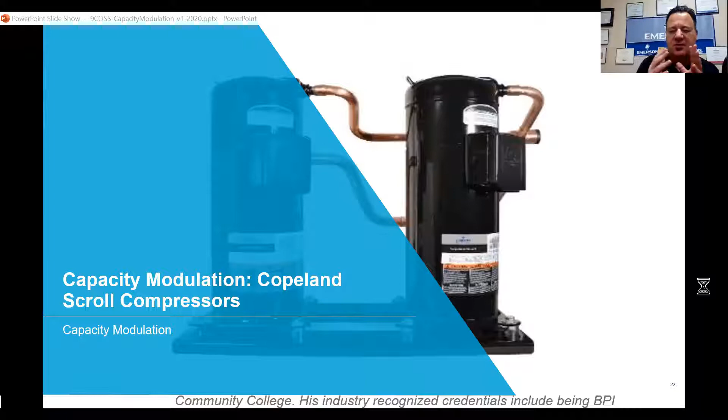Most of you might already know this. The students may not, okay? Some of you instructors, if not all of you, probably already know where I'm headed with this, but I think it's important to point out just a few things about the scroll that I think will make better sense when we get into the modulation part, when I start using some terminology. All right?

So here's our orbiting scroll, and here is our fixed scroll, which is on your right. Okay. All right, so just so you know, I'm not going to go into all the details about the scroll set because this is about modulation, but I do want you to understand some of the moving parts in here. I think it's important for us to have this conversation prior to getting into modulation, okay?

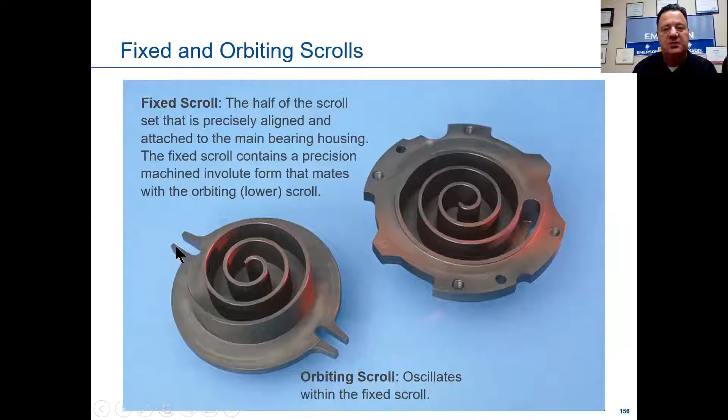The very top of this is your tips, the sides is your flanks. This is the Oldham coupling, and the Oldham coupling, moving back here, is what keeps this aligned, all right? These notches, all right? And let's say this is the orbiting scroll on these two pegs. This is the fixed scroll on these two pegs. And basically, it keeps it from going out of alignment.

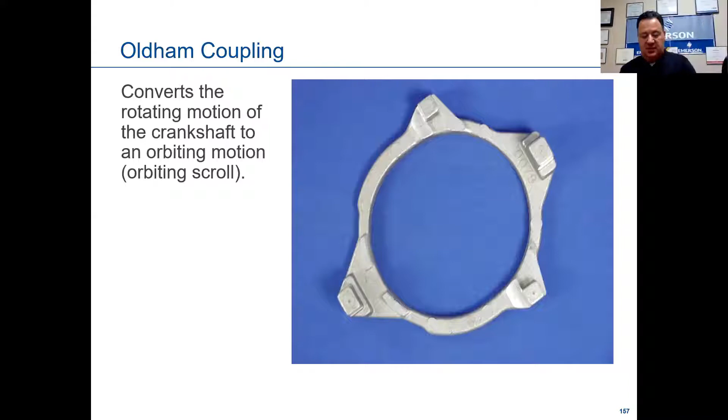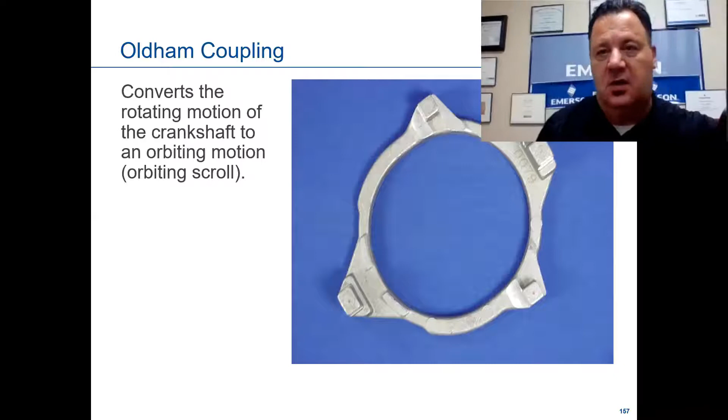I'll show you, put this together here a little bit. Okay, so that's how it looks. I've got the Oldham coupling on these scroll sets, and it's going to go in like this, move around, and compress that gas along those flanks on the side, all right?

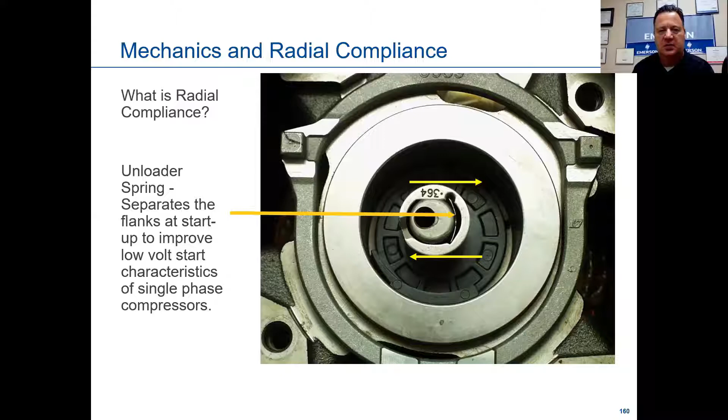So it's much more tolerant than, let's say, a reciprocating compressor is. It doesn't mean it will take liquid refrigerant, by no means, but it does help tolerate it quite a bit if in fact it gets inside there.

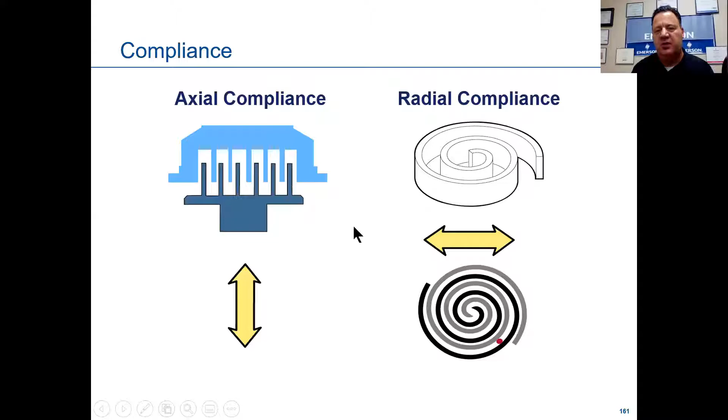So on the left-hand side, we have axial compliance. Now, axial compliance, and I usually ask the class to write this down. This is heavily exaggerated. We're looking more at like 1 millimeter of movement up and down. Axial will be up and down, your vertical movement. This is the radial compliance where I showed you that piece of Swedish steel earlier. This is real important to understand, and this is why I wanted to talk a little bit about the moving parts and just the basic fixed scroll before we get into modulation.

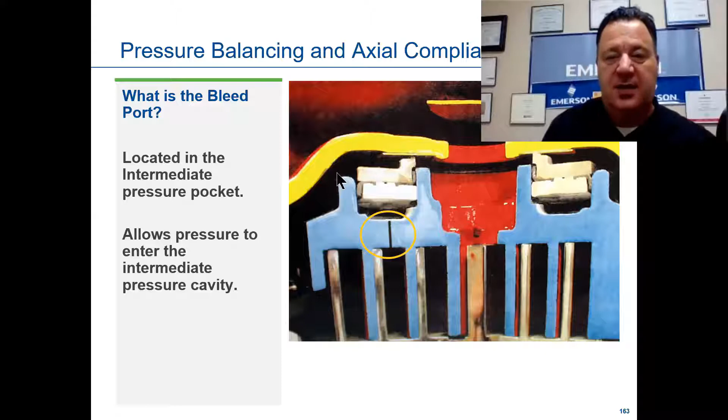The scroll starts out unloaded, okay? It's a 2-pole motor, runs at 3,500 RPMs, roughly nominal, okay? When it starts to load up, as the gas starts to get in, the contactor pulls in, we have a little bleed port here, and as this starts to pressurize on the scroll, the way this floating seal works, this is a large one on the top of it, and it sits right there on top of that fixed scroll I showed you earlier. The bleed port allows gas to get in that cavity. This is normally sitting on that ledge there.

And what happens is 2 things are going on there. It pressurizes that cavity, causing this floating seal to push up on the muffler cap, but it also allows the fixed scroll to go down with the tips of those scrolls touching, okay? That pressurizes that and pushes that 1 millimeter. It's important to know that 1 millimeter because, again, that's going to come into play in our modulation.

This is just a better look at the floating seal. Here on the left-hand side, you're looking at the floating seal sitting down inside that fixed scroll. Right down, looking at the top of it. Here's what that floating seal looks like. This plays an important part because it separates that gas, as we talked about earlier.

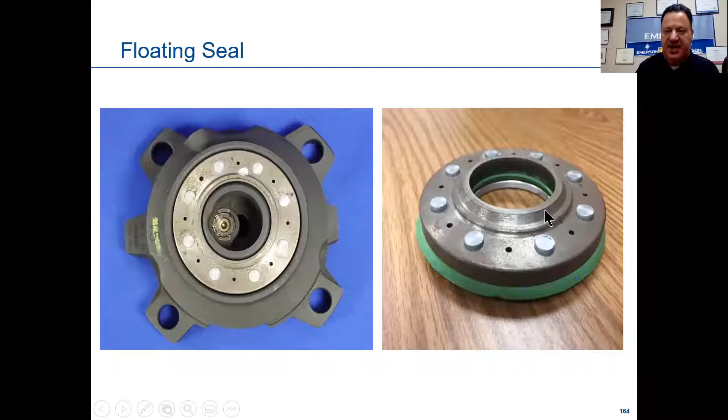When this pushes up to that muffler plate, it doesn't allow that discharge gas to go over the top of it. So it isolates it, forcing it to go out the top above that muffler plate and at the top of the scroll compressor. If this were to fall down, and I'll get into that later on, okay, this gas would then come around and re-enter that suction gas.

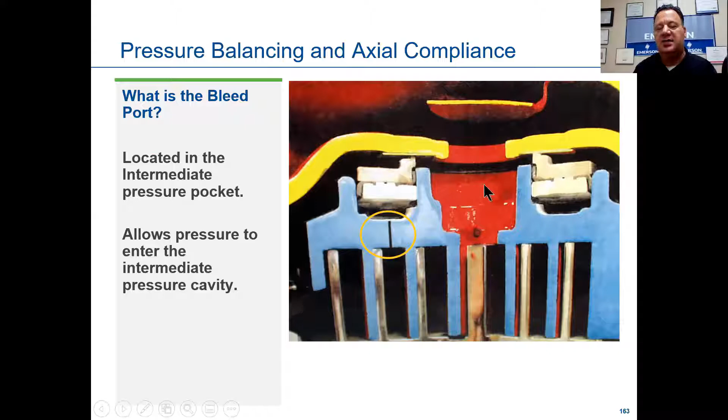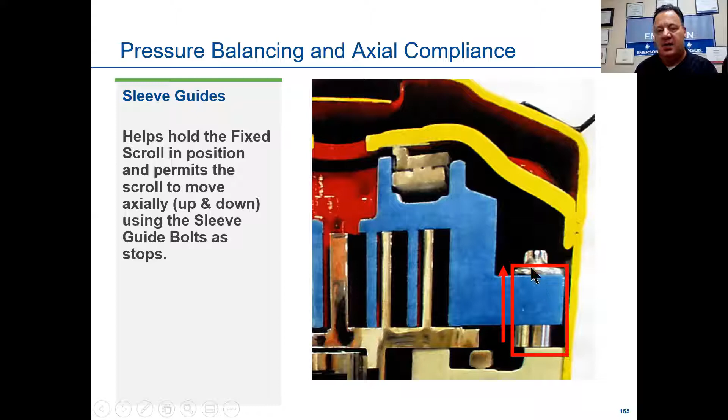Over here is what we call sleeve guides on the right-hand side. That is allowing that 1 millimeter separation when we load and unload, when we get into digital. When I refer to that 1 millimeter on that sleeve guide, this is what I'm talking about, all right? And we'll get more into that as we move along. This is just showing you a check valve.

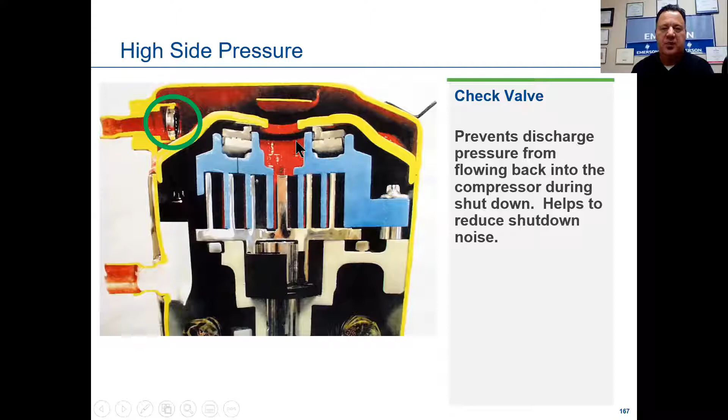Most all compressors or scroll compressors have check valves in them. They range from anything from inside the discharge line as it moves out, leaving the compressor, to dead center, right in the heart of the compressor at the hottest point, in the discharge port. Some may have two.

All right, let's start in with the capacity modulation. We're going to talk about four specific modulations: two-stage, variable, digital, and then multiples, tandems, and trios. All right, so let's walk through these here.

So capacity control modulation methods, we'll walk through each one. Two-stage: a 30,000 foot view here at the beginning is full capacity, obviously 100%, like a fixed scroll if you will. That will be your second stage at 100%, obviously. 67% or 65%, two-thirds of the capacity will be your first stage. And I'll show you how that works also.

And then staying at the top to the right of that, we have variable speed, customized scroll with variable speed frequency drives. We'll talk about the drives and how that works, because that's the one that's really catching on a lot in the industry right now. I foresee that being a big major player, as it did with mini splits years ago.

And then we have at the bottom left, digital, mostly seen in refrigeration, can be used in air conditioning too. I don't want to sell it short, but we'll talk about where that best fits at. It starts at 10% to 100%. In other words, until it gets a call for 10% of the capacity, it does not turn on.

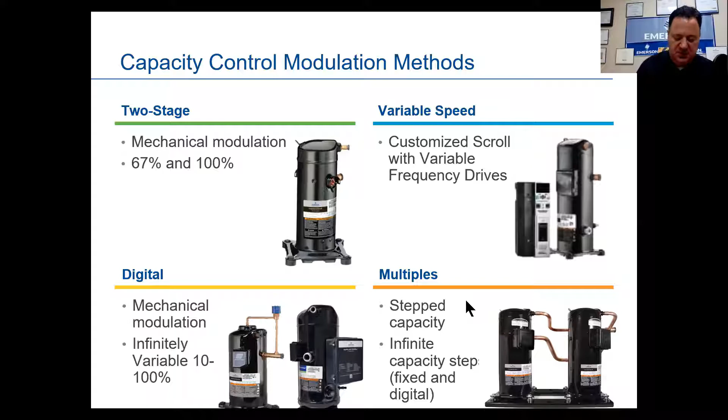All right, and then we have multiple, tandems, or trios. It's a step capacity, infinite capacity steps, fixed and digital. So you can have two compressors, they don't have to be the same size, they don't even have to be the same model of the compressors. They can be different BTUs and different tonnage. So we'll walk through those.

Now this is just a snapshot of the compressor modulation technology comparisons. I'm not going to spend a lot of time on this because this is more salesy marketing. I do show this in class, but it's just really to give technicians an idea, if they're quoting equipment, what that might look like to them.

All right, so we have our fixed scroll. We talked about that a little while ago, just basically the anatomy pieces of it. We have the modulation technology on the top left, and then we have our products, the range, what horsepower they come to, the part load efficiency, full load efficiency, and then what does that look like with comfort. And then we have our applied cost. So again, we start out with fixed, we then have two-stage, we have digital from 10 to 100%, variable speed, and multiples.

Now, none of these compressors, with the exception of variable, have a pump for lubrication inside them, all right? So that's unique to that. If you're teaching scrolls, at least the Emerson scrolls, we do our lubrication basically by physics. We manipulate the shaft and different things in there, and apply that lubrication up through that shaft by simply ramping up that 3,500 RPMs that a fixed scroll has.

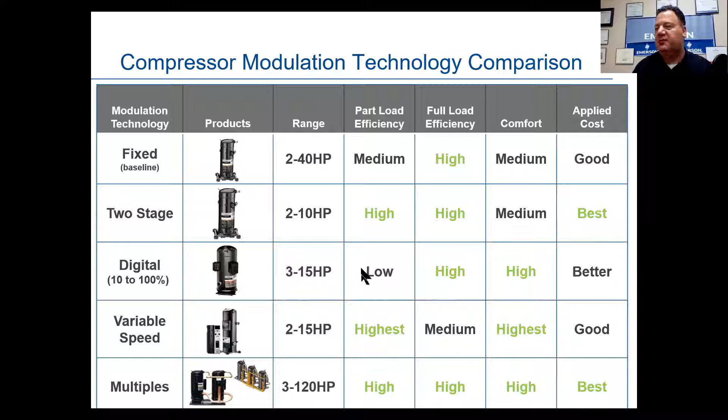The next one that I really think is a great technology, especially in refrigeration and air conditioning, that's catching on quite quickly is the digital. We unload and load that compressor, we don't shut it off necessarily. I'll talk a little bit more about that here in a little bit.

All right, the first thing we're going to talk about is our two-stage. And again, we're talking about 67, 65%. The reason I say 67, 65, on some videos that Emerson's made it will say 67%, some presentations I've seen will say 65%. Neither one of them's wrong. Just remember this: first stage on a two-stage compressor, at least when we talk about it, is going to be about two-thirds capacity. So the 100% is like a fixed capacity, partial capacity or first stage is going to be about two-thirds of 100%.

In fact, I'm going to show you, this is part of that ring I was talking about at the very top. I don't know if you can see this or not. I'll do this again, I attempted this earlier and it seemed to be okay. You can't really tell, but there's three little holes in the top of the fixed scroll.

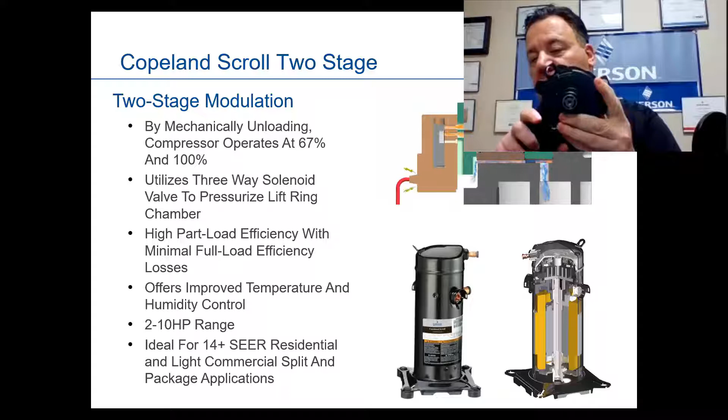There you go, you can see my light coming through there. There's three little bleeder holes on both sides, and they're in the medium area of that fixed scroll. See my flashlight shining through there? Two little bleeder holes at the very top, you can see it.

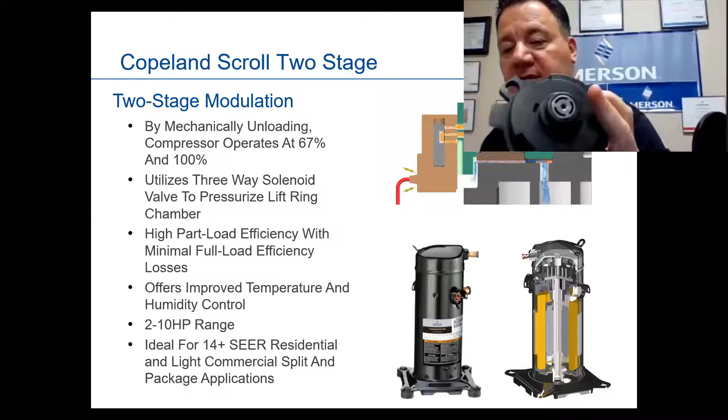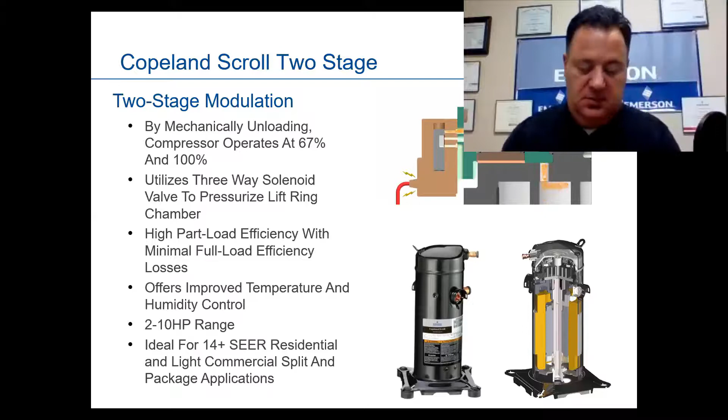When those get blocked off, it doesn't allow that refrigerant to come out. When it slips out, that module — it's AC to DC, and it causes it to turn and bleeds off. Now in this animation, you can see, now we're powered, we're shutting it off, we're running 100% capacity, unloaded, shutting off.

Now, high part load efficiency with minimal full load efficiency losses offers improved temperature and humidity control, in the 2 to 10 horsepower range. Ideal for 14 and above SEER, residential, and light commercial split and package systems.

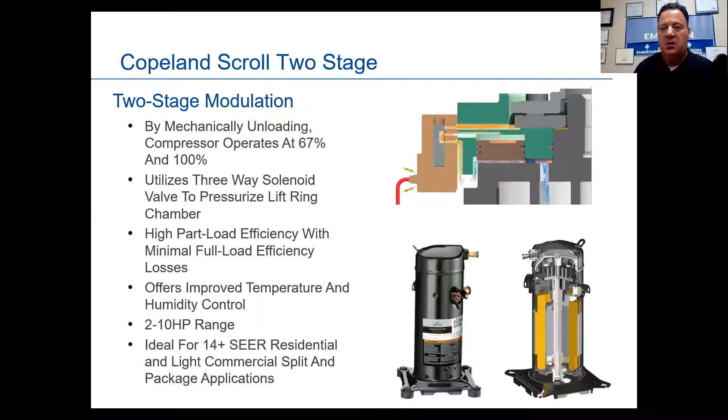See a lot of two-stage out there in residential and light commercial. For the most part — and I haven't been gone all that long in the field — two-stage is, I mean, most of the technicians are fairly familiar with it. Do they know how to troubleshoot it? That might be a different story. I don't know, but they understand the concept of it.

Now, the Copeland scroll two-stage modulation operation, at the very top, I'll start up here. Again, you're powered up, all right? Now we're blocked off, we're at 100%, or here we're at partial. We energized, blocking it off. Now we're at full capacity. Here we're at 67%, you can see it's bleeding off.

Over here on the right, partial load operation: intermediate cavity pressure is communicated to a lift chamber via a three-way valve. The valve is de-energized when we go into that first stage, as we talked about earlier. You can see that lifting up, that lift ring, that three-way valve lifts it up, and those bleed ports that I showed you earlier in that medium cavity — here's the low, medium, and high pressure cavities — will bleed out from both sides.

All right, modulation ring moves up, opening the bypass. At the bottom, you'll see it's a full load operation. Suction pressure is communicated to the lift chamber. The valve is energized now at full capacity, at 100% or a fixed capacity. You can see the bleed ports down here at the bottom on the left. Partial load, when it shifts, those open up. You can see at full load, those ports, if you will, are blocked off.

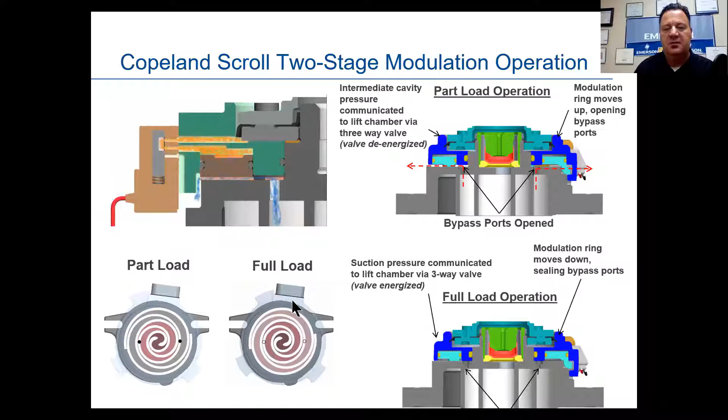Here's our module. Okay, now we're going to talk about multiples — that's going to be tandems and trios. All we're doing is taking multiple compressors and mix and matching them. They could be uneven or even — in other words, they could be the same capacity on both compressors, or for the trios, they could be the same capacity, same BTUs, horsepowers, or they could be mix and match. They could have a digital on them. So there's all different opportunities here to best fit that application.

So let's take a look at this. This one is the easiest one to comprehend, because all you're really doing is matching up the load with multiple compressors.

What is a multiple? It's a pairing of two tandems or three trios, fixed speed and/or mechanically modulated scroll compressors, variable speed, digital two-stage compressors, to achieve a capacity modulation. Multiples allow modulation of compression capacity while maintaining efficiency and potential reduction in cost. You see a lot of this in commercial applications, some refrigeration applications.

Very good stuff. You won't see things like this in residential, obviously, but there is a place for it, and we sell a lot of these. The only thing I want to point out to you, if you're an instructor and you're planning on teaching this, or at least touching on it, the thing I like to drive home when I'm delivering this out on the road is be aware that there's going to be multiple model numbers.

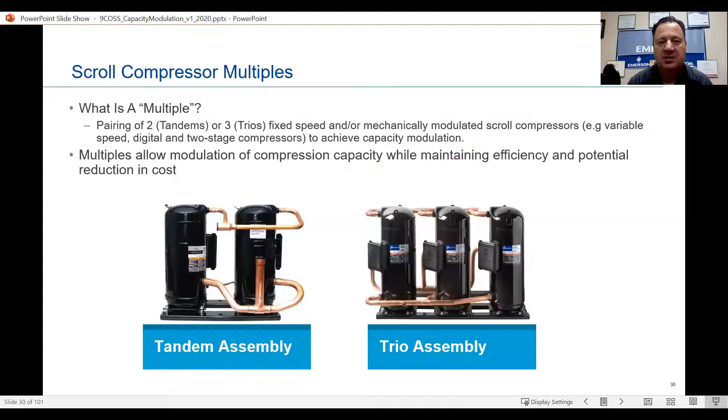Okay, advantages of compressor multiples: efficiency and economical — high system efficiency at both full load and partial load, possible reduction of applied cost through reduction in the number of circuits in the HVAC-R system. Flexibility — versatile compressor combinations to meet targeted part load efficiency points. Oil management — no auxiliary oil management hardware needed. And load matching, as they all are in modulation. That's basically the whole concept of matching the load. Stepped capacity modulation for higher part load efficiency levels.

You know, we talk about two-stage. The nice thing about two-stage, where it's a good fit, is you do not need any type of special third-party control of any sort. You need simply a two-stage thermostat and you're good to go. So that's one of the benefits in that application.

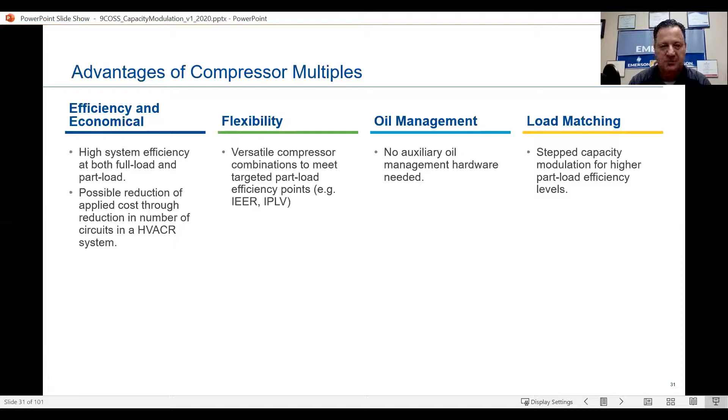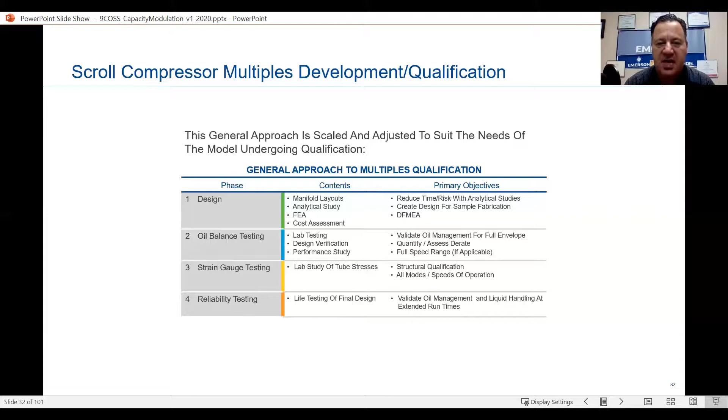That's thinking that you're keeping them inside the envelope, okay? So if you've got a matted condenser coil for 2 years or a whole summer and it's running at high head pressure, that's not necessarily going to be in that envelope, correct? So we shoot for 15 years minimum on all our compressors.

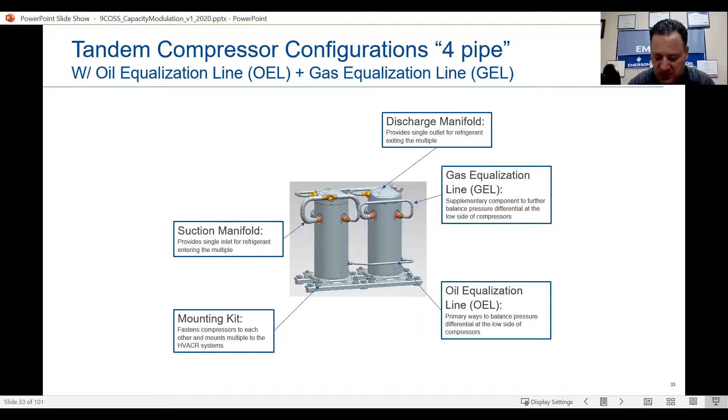Now look what we've done here. We went into the multiple configurations and parts added to the compressor with a 2-phase tandem. Here we have a 2-phase tandem, unlike the 4-pipe, and the 2-phase tube, or TPTL, a secondary way to balance pressure differential at the low side of the compressors, and it connects to the sight glass of the compressors, okay?

And then we still have the discharge side up here. Of course, we'll have the mounting kit and the suction manifold.

Again, if you are in a position where you change out one of these compressors, if that service ticket allows you to, and not have to change out the whole tandem, be very aware that there's a lot of engineering that goes into this connection between these two compressors. I would suggest not to try to fabricate that yourself. The reason being is sound.

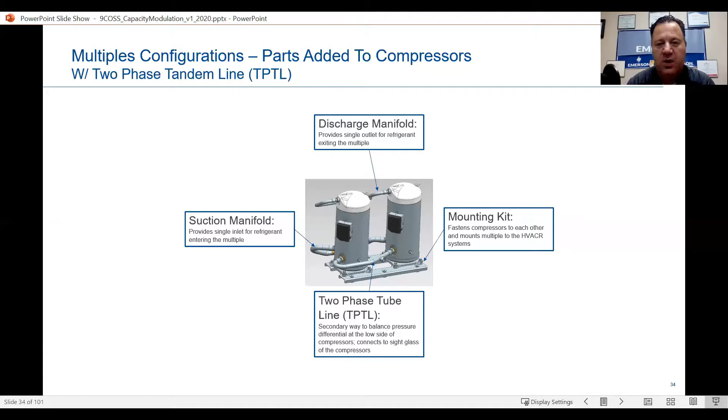This is an actual part itself that you can order along with that. So when you're ordering through the wholesaler, make sure you're aware of that. I'm talking to you like you're a contractor now, because that's the way I normally teach, but you're an instructor. All of you are teachers, but you get the gist of it. Be very, very aware of that. This is for your own personal knowledge.